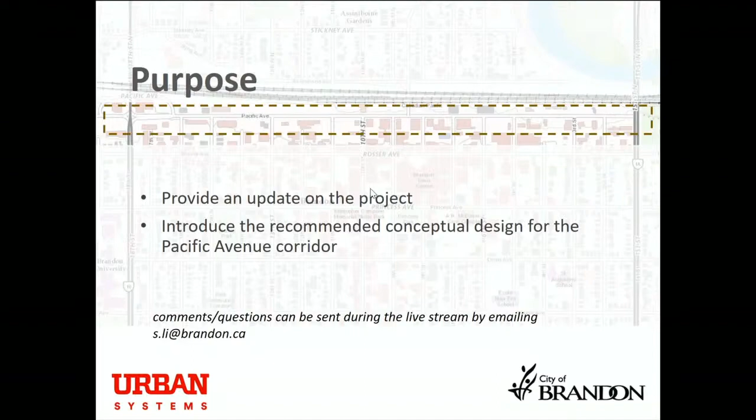Here's an overview of today's presentation.

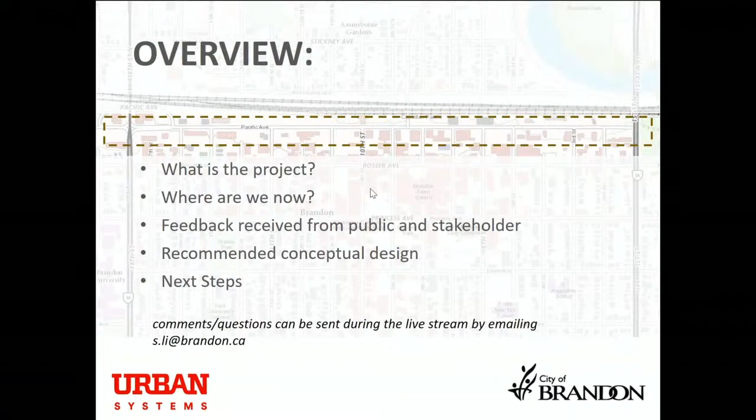The project started in late August of last year, 2020. The city retained Urban Systems, a consulting firm, to undertake a conceptual design study and complete a streetscape strategy of Pacific Avenue. The project encompasses the areas surrounding Pacific Avenue between 1st Street and 18th Street. It's intended to implement an action item in the downtown sector plan to explore options that improve multimodal connectivity and promote economic development along the Pacific Avenue corridor.

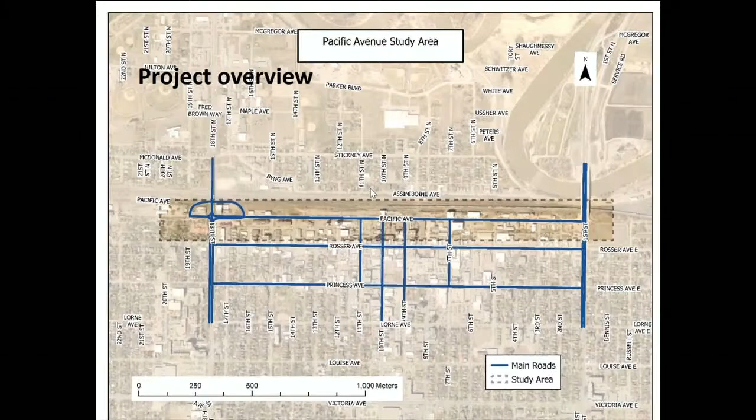Here's the timeline of this project. Right now, we are in the final stage of this project.

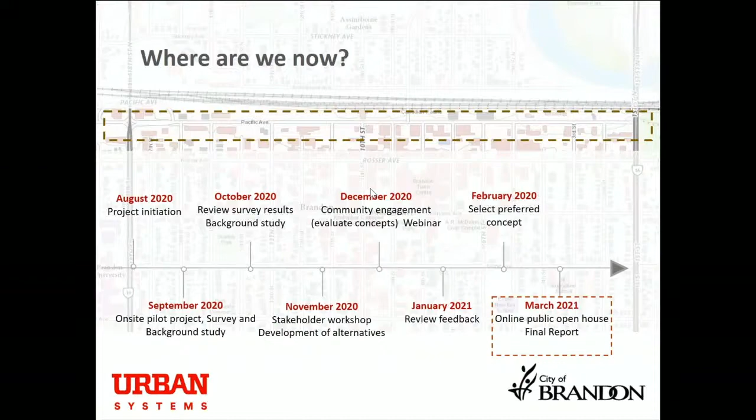The project team conducted a series of public and stakeholder engagement events, which are listed on the screen, to collect information and obtain input from the public and stakeholders for this project.

The project team did an online survey to get public opinion on the pop-up bike lane, which was installed on the north side of Pacific Avenue last summer using the on-street parking lane. The survey results show half of the respondents use vehicles as their regular mode of transportation, and the other half use cycling and walking.

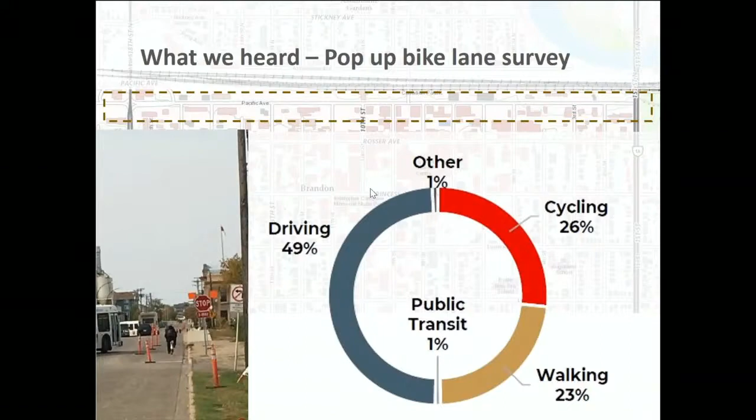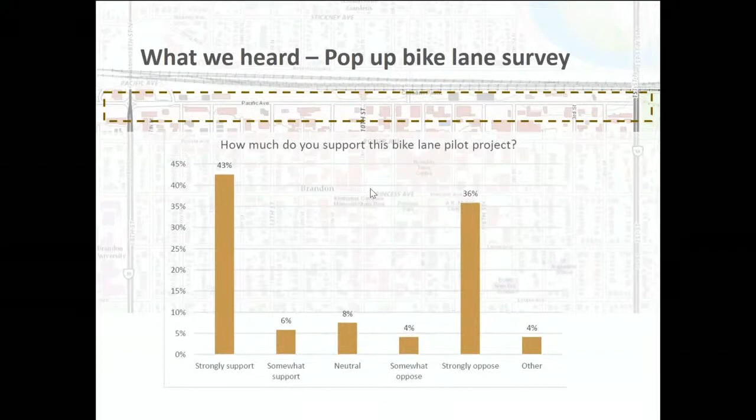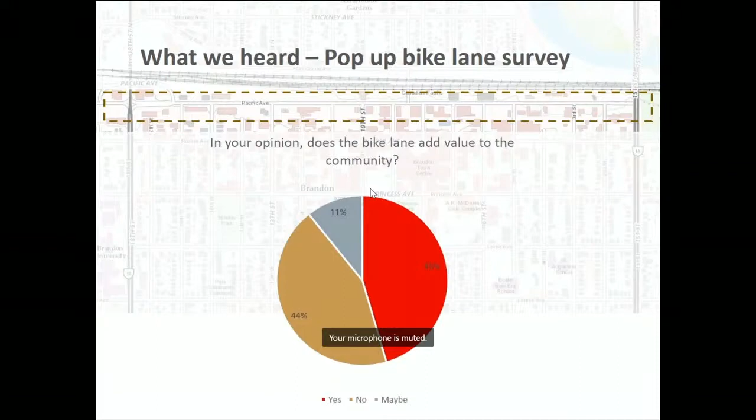The survey also shows a polarized opinion in terms of the support for the pop-up bike lane. Again, another split of opinions from the survey on whether the bike lane adds value to the community.

An online interactive map tool was also created for the public to identify what they like or don't like about the current road conditions of Pacific Avenue, as well as to make recommendations. Some of the highlighted comments include: it can be difficult to cross during peak traffic time, sidewalks are missing in some segments of the road, and bike lanes need to be separated from pedestrians.

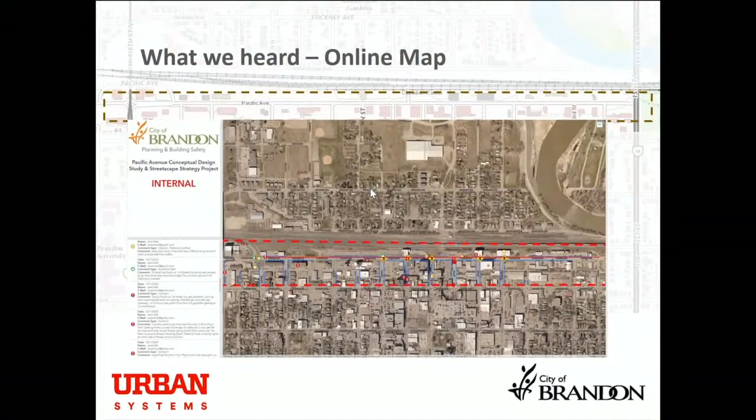The project team also held a corridor visioning workshop to engage internal and external stakeholders in this project. Connected, safe, and active are the top three project values that emerged from the workshops.

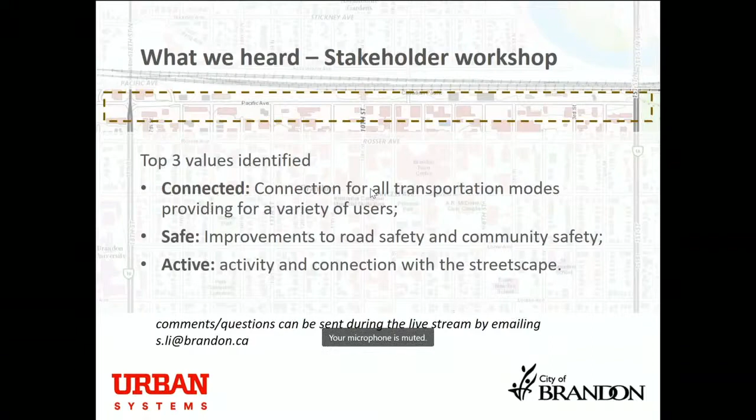During the workshops, stakeholders participated in visual surveys to provide feedback on design elements. This is an example of the questions asked to participants to show what characteristics resonated with them. Now I will turn it over to my colleagues at Urban Systems to introduce the conceptual design options.

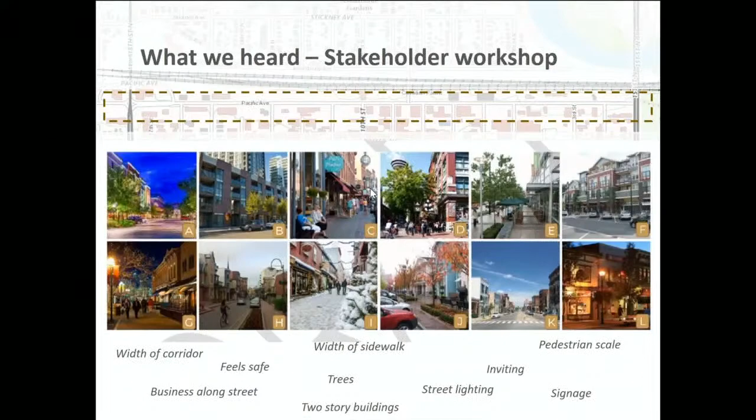Thanks, Zhengzhu. So after we received all of the feedback from both the public and stakeholders, we as a project team went and looked at different options that we thought might meet the goals of the community and goals of the project along the corridor. With that, we developed three different options.

The first option is to add a bidirectional bikeway on the north side of Pacific. This bikeway would be separated from motor vehicle travel lanes and would require removing on-street parking on the north side of the street. Some of the other elements to improve the streetscape explored for this option are curb bulges at intersections and key locations along the corridor mid-block, as well as other landscaping features such as street trees and other planting opportunities.

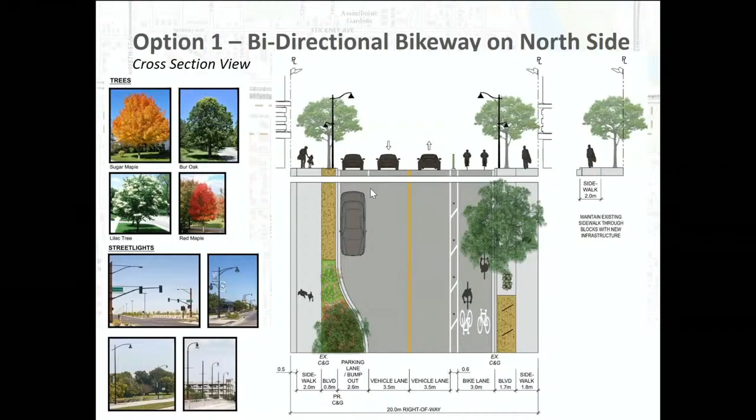If you go to the next slide, Zhengzhu. The second option we looked at is to have a multi-use pathway on the north side. Something common with both option 1 and option 2 is the use of the north side of Pacific. One major consideration for this being the preferred side for a two-way facility is that Pacific is the last road east-west before the railway, so there are no through intersections, meaning the number of conflict points between people walking and biking on the north side is significantly fewer than on the south side of the street.

This option has a facility shared by people walking and biking on the north side of the street. You can see in the images a couple of different configurations considered along the corridor, one with on-street parking running parallel, and other locations where curb bulges would be introduced, providing opportunities for improved landscaping or streetscaping, such as street trees, seating areas, or other enhancements.

On the south side of the curb with this option, since there's less space required for the shared facility on the north side, there's additional space for the sidewalk and streetscape features on the south side.

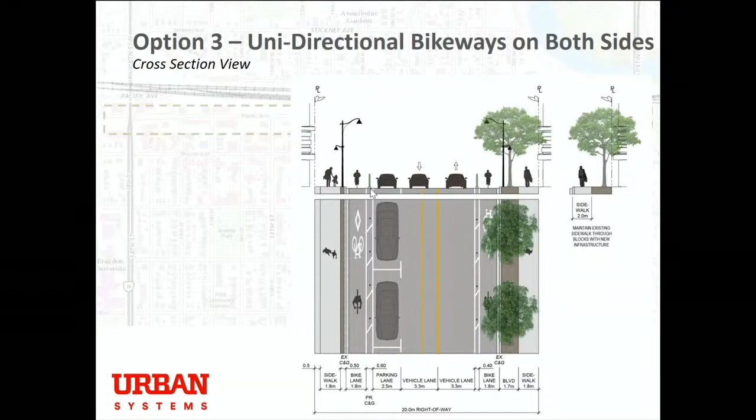Thanks, Brent. In order to proceed with evaluating the various options, the project team came up with a set of criteria to form the technical evaluation. These subjects represent a variety of technical areas of interest and comparison for each option presented: connectivity, safety, social impact, impact to emergency services, pedestrian comfort and accessibility, cyclist comfort, motor vehicle travel, impact to transit, streetscape, business access, parking and loading impacts, implementation and phasing, street maintenance including snow removal and sweeping, cost, utilities, and of course public feedback.

A rating system was used of very good, good, neutral, satisfactory, poor, and worst, and these ratings were given to each of the different options in each category.

During the previous round of engagement with the public and stakeholders, they were offered the opportunity to provide a rank of their 5 most important evaluation criteria.

As we go through this list, the ratings were summed for each option and an overall comparison came forward. The overall rank on the technical evaluation resulted in option 1 being the best option, with option 3 being the next best, and option 2 being the third best.

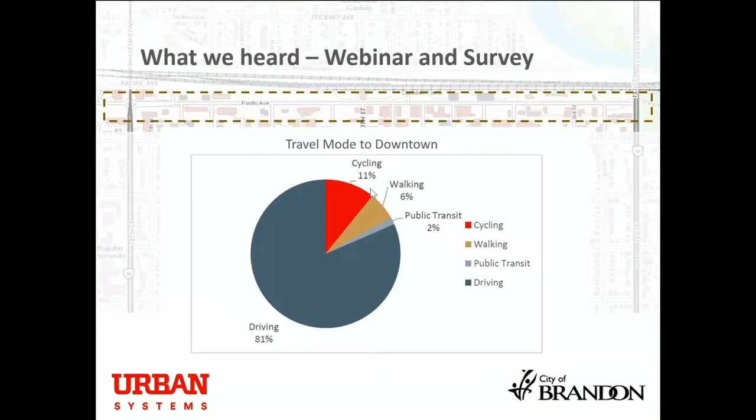The most supported design option was option 2, with 40% of respondents strongly supportive and 22% somewhat supportive. Option 1 was the second most supported option, with 25% of respondents strongly supportive and 32% somewhat supportive. Option 3 was the least supported.

Here are the top 5 evaluation criteria identified by respondents: safety, impacts to parking and loading, pedestrian comfort and accessibility, motor vehicles, and cyclist comfort, which is tied with motor vehicles.

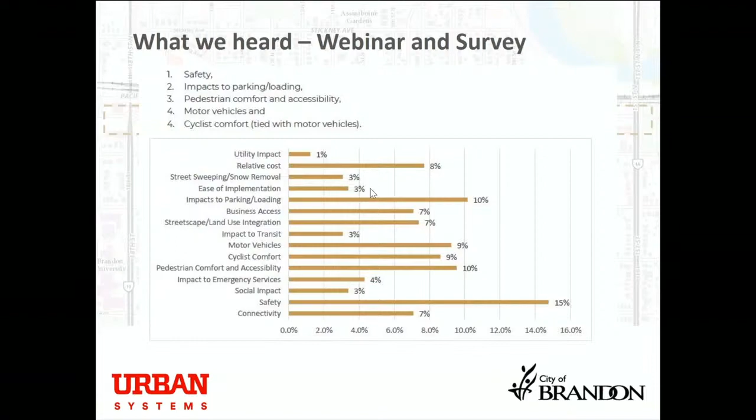When asked to rank the provided design options, option 2 was the number 1 most preferred design. However, when responses were weighted, option 2 and option 1 were very close.

Now I will turn to my colleague Sam to introduce the selected design.

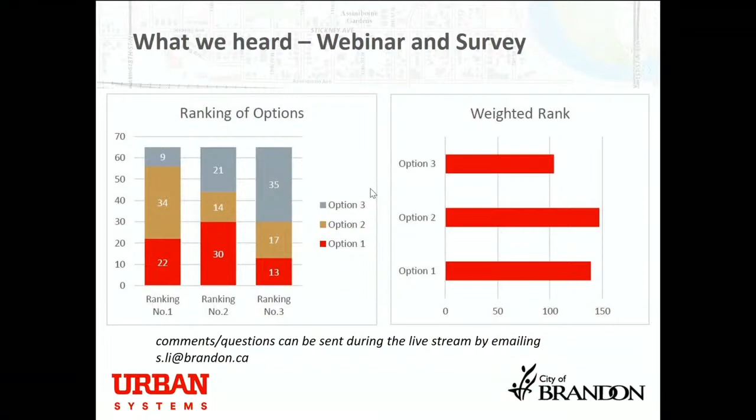Thanks, Shengju. Based upon all the collected and analyzed data, and of course the public feedback received as part of our stakeholder engagement, the project team selected option 1 and option 2 as recommended design options, and an integration of these two designs would be completed for the selected design. As we've seen, there are components of each design that are important to this corridor, and we have done our best to incorporate them into the final design.

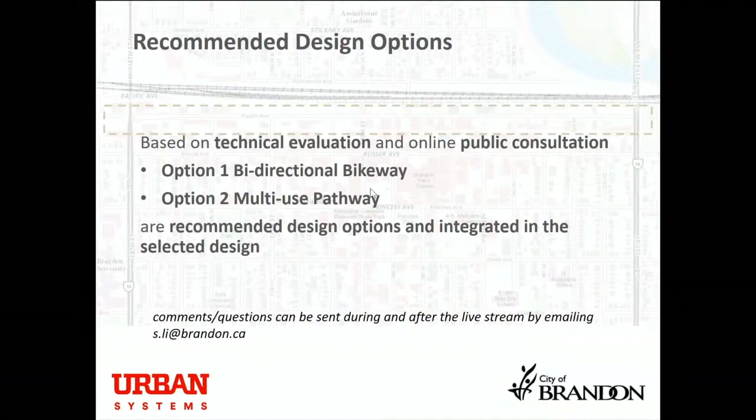Normally this public engagement session would take place in person with a full-size plan laid out on a table so we could gather around and see the concept in its entirety. But given current restrictions, the project team will take you through the selected design starting at the eastern limit of the project area, near First Street and Pacific Avenue.

This provides ample spot for what we'll call a gateway feature location. We'll talk more about that after the selected design presentation. The road then curves back into the alignment of Pacific Avenue that we know.

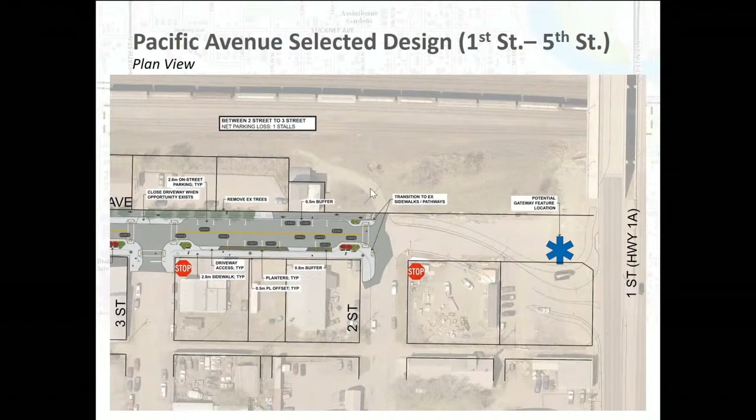The design commences at about 2nd Street, where the eastern leg of the selected design incorporates the multi-use pathway on the north side of Pacific Avenue that we had seen from option 2. It provides for preserving parking on both sides of the street.

Moving west, the elements of option 2 continue past 3rd Street, and here some existing trees would have to be removed on the north side to make way for the multi-use trail. But ample space still exists on the south side, and opportunity for trees on private property can be incorporated into the design elements of redevelopment as necessary.

Bulb outs are proposed where parking is not feasible due to the spacing of accesses, and these form part of the traffic calming along Pacific Avenue.

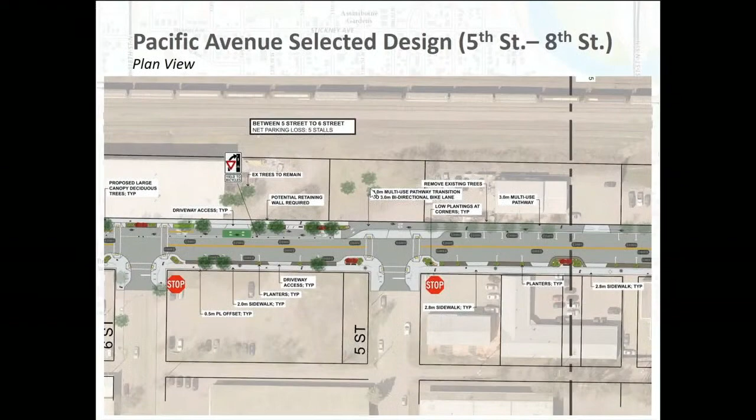Further west at 5th Street, we see the multi-use trail transitioning into the bidirectional bikeway from option 1. Existing driveway accesses are maintained and signed accordingly to ensure vehicles watch for cyclists. Trees are again present on the north side due to the boulevard space between the on-street bikeway and the northerly sidewalk.

Continuing west, bulb outs continue to be present on the south side at intersections, providing ample space for pedestrian visibility and shorter crossing distances to improve safety. These bulb outs carry around the corner at each street intersection with Pacific Avenue.

The design recognizes the existing sidewalk improvements the city recently made along the north side of Pacific Avenue between 9th and 13th Streets, and we maintain that infrastructure by swapping the boulevard to the north side of the sidewalk.

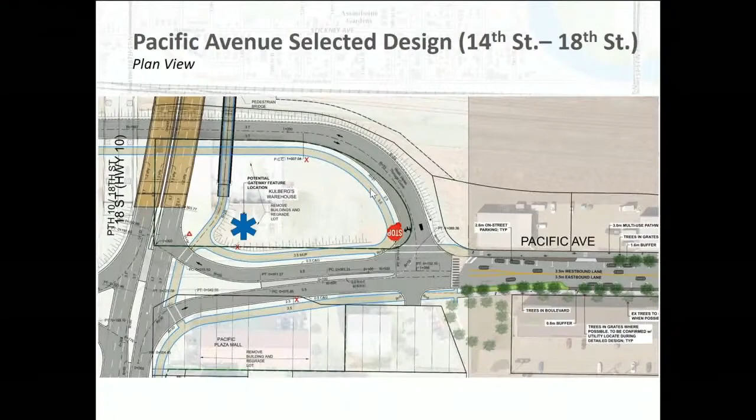So I'll turn it back over to Brent or Marcia from Urban Systems to talk a little bit about what gateway features are.

With the gateway feature, the intent is to essentially bookmark both ends of Pacific Avenue. We're trying to create a heightened entry experience for users and to start to build a unique sense of identity for Pacific Avenue.

Much of our design inspiration for the concept comes from the study of the architectural heritage along Pacific Avenue, and also the broader context of downtown Brandon. We've also combined it with an industrial influence that references the city's rail history and the site's proximity to the existing railway.

In option 1, what you'll see is more influence of the architectural history of the downtown, and we have some strong vertical elements in our design, as you can see with the columns showcasing Pacific Avenue, as well as the downtown branding.

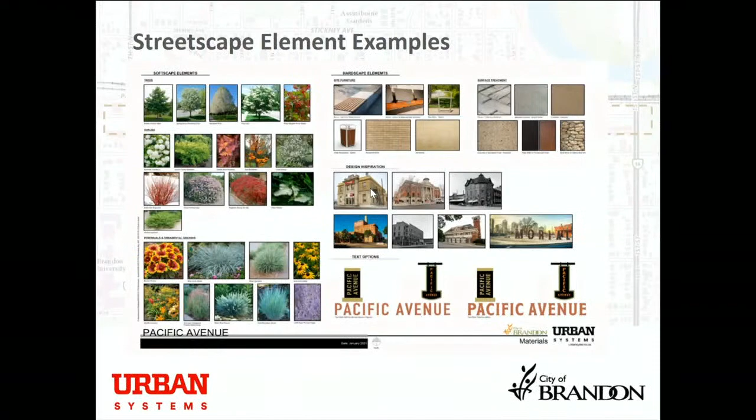So again, our next steps for this project will be to continue to engage the public and stakeholders, of course, answer their questions about the selected design, do any refining to our design based on stakeholder feedback, and then finalize the report.

A discussion on implementation will continue internally with the City of Brandon, and externally with relevant stakeholders about the various timelines for the project. That would include phasing based on development proposals, and fitting changes into the city's capital plan for infrastructure improvements. The city will continue to solicit any available grant opportunities as an option to help fund these improvements.

So at this point, that kind of brings us to the end of our formal presentation.

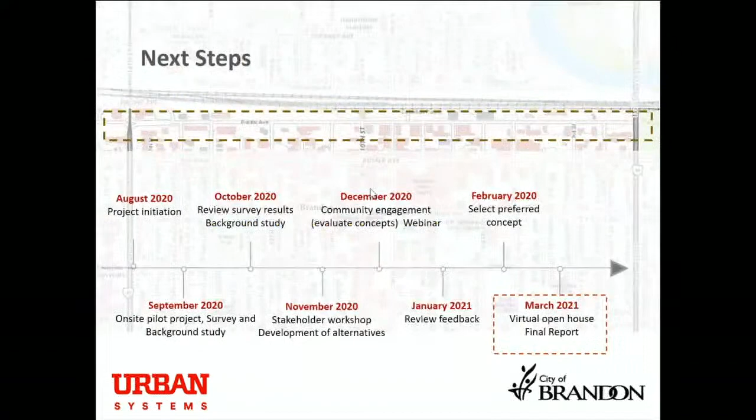Sure, I can jump in there, Sam. Standard bikeway design has progressed over the years, with green paint, called conflict paint, used when protected bike facilities cross through areas of higher conflict or potential risk. The idea with the paint is that it's a visual cue to both drivers and cyclists that this is an area where paths are crossing, and that the protection and barrier providing separation for people biking is no longer present. So it's a visual cue to remind both that there may be conflicts and extra attention is needed.

Along with that, some of the signage you're referring to is a yield-to-crossing-bike sign. Something new with these protected bikeways, similar to a painted bike lane, is that bike traffic will be traveling on the inside of you, and when making a right turn, which for any driver is typically made from the curb lane, you need to be aware there may be someone biking crossing. So the yield-to-crossing-bike sign provides additional awareness for the driver to drive slow and really check their blind spots for oncoming cyclists.

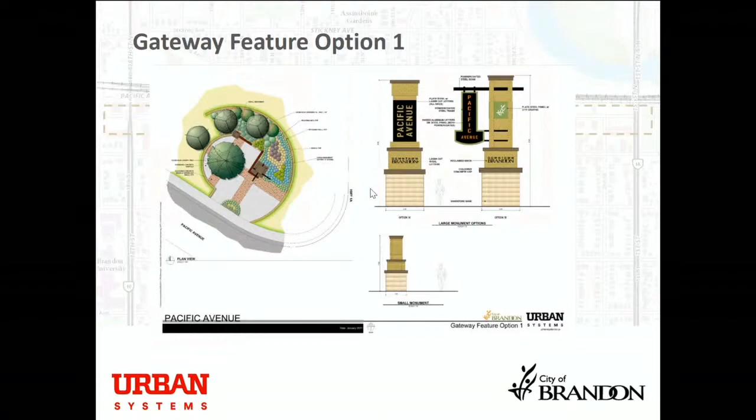Similarly, along the outside circle, that's essentially where the signage gateway feature would go. So it is long and horizontal, but it's meant to be on a curved edge around the outside of the plaza area.

Thank you, Marsha. Another question is about the lighting. Is there any lighting for people walking included in this design?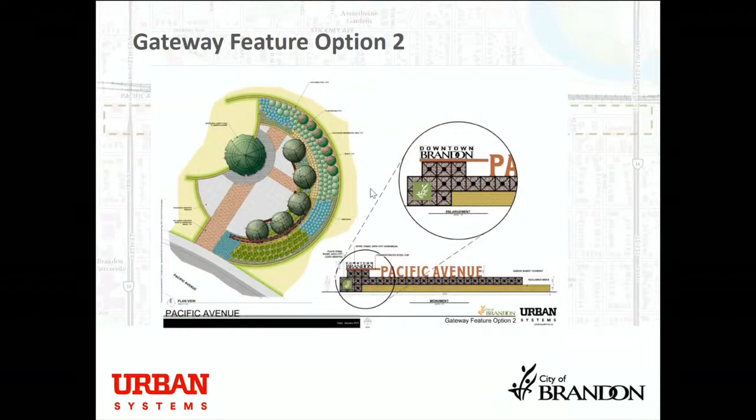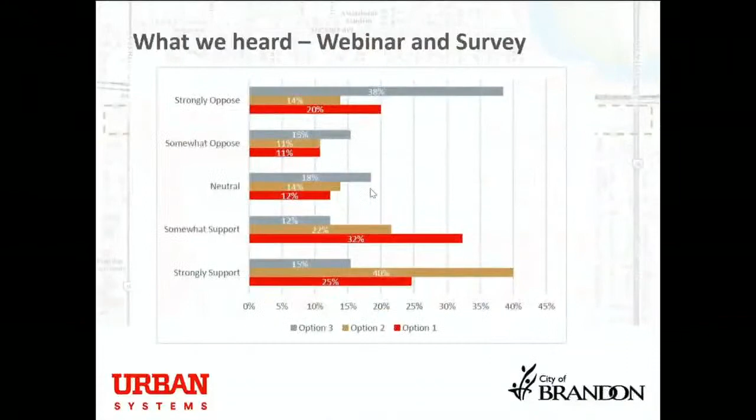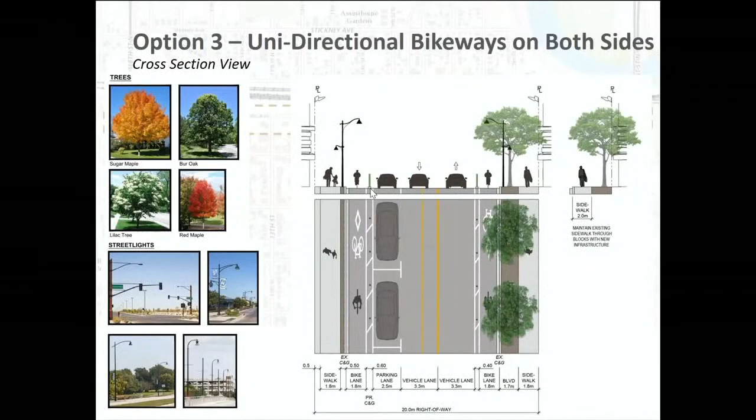It was brought up, it's shown in the option. If you go back to the option slide, you'll see we haven't chosen a specific one, but we've identified some potential options for the street lighting. It's meant that once the corridor goes into a more detailed design, a more pedestrian-scale lighting will be selected than what's there today. Along the north side there is an existing hydro pole, so there would be some need to coordinate with Manitoba Hydro for the future street lighting improvements.

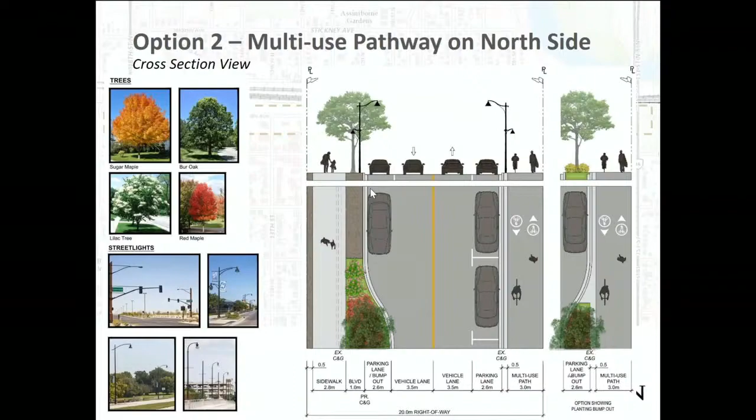Is there any other questions, Sangju, for the landscaping? Not yet. Okay. Actually, now that we're talking about landscaping, one other consideration we were going to make—don't know if you can go to design slide 27, Sangju.

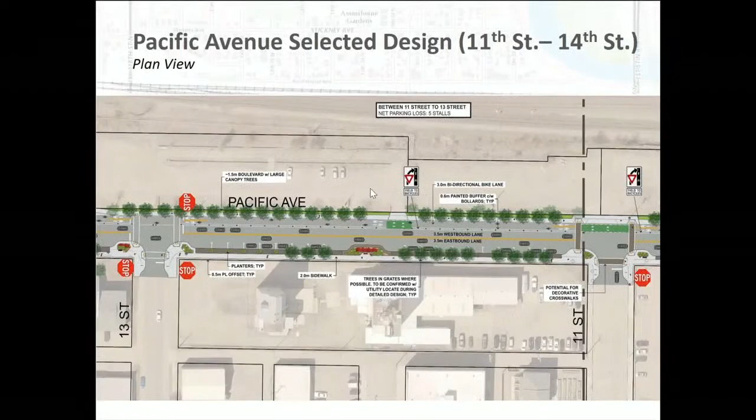But in that slide, you can see that along the north side, between 8th Street and 11th Street—yeah, there we go—along the north side you can see there are some tree grates and trenches that we have options of also doing.

And in these areas we can explore stormwater measures, where we could potentially take some of the street stormwater into these landscaping areas and do a bioretention area or green infrastructure. So that's something we'll be exploring further as potential options the city can carry forward into future design consideration.

We also introduced decorative crosswalks along the corridor just to enhance the crossing areas for pedestrians, particularly in those middle blocks towards the downtown area.

So between like 11th Street and 8th Street, even though we don't have a specific design for that now, or material types, or if it's just going to be painted or textured, we just noticed that in the concept design there's a different shade along those crosswalks.